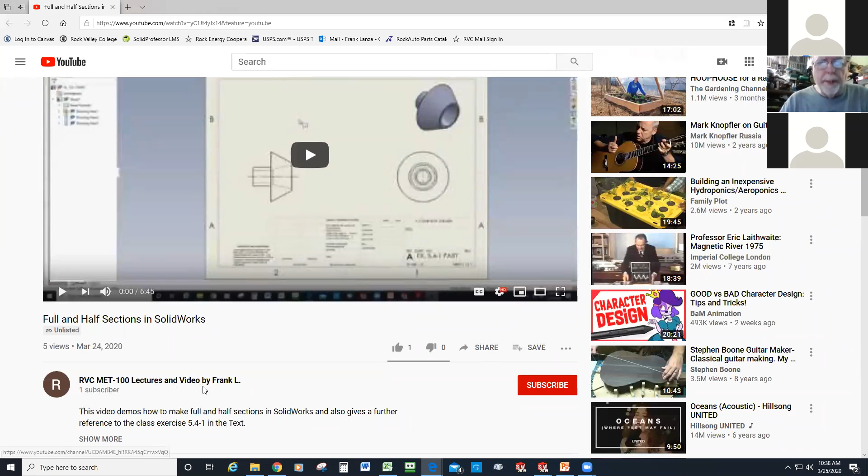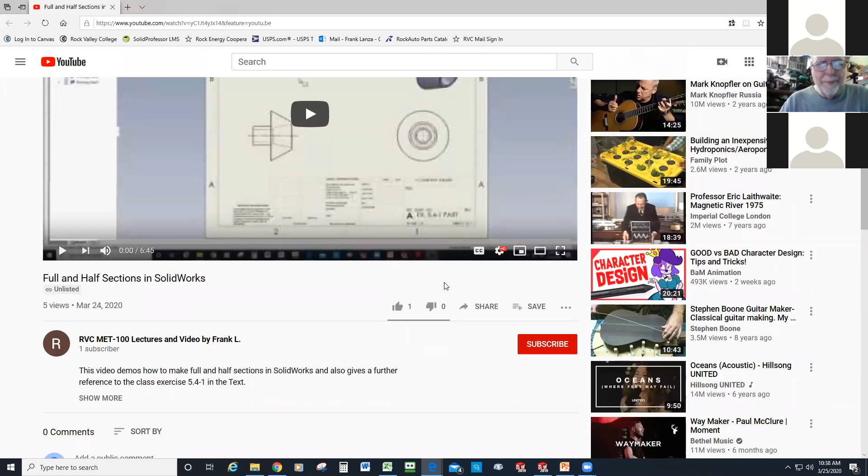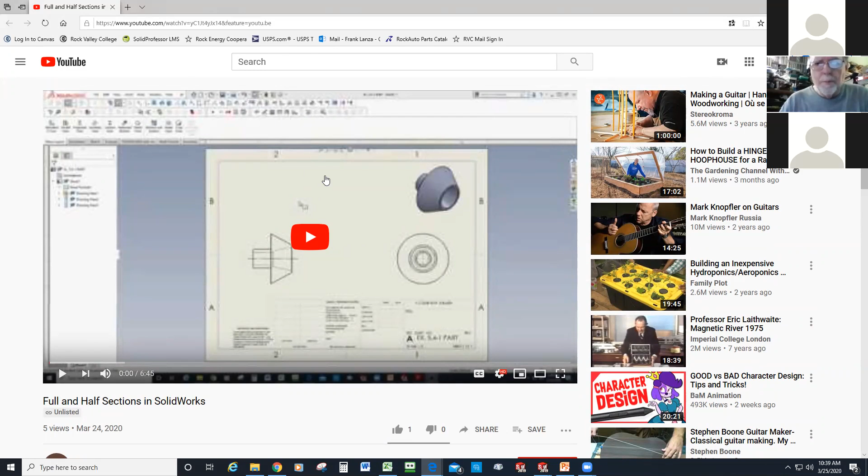So hopefully that'll get you in there, and I'll go back and look and see. Like I said, I might have, when I created it, said it was private, assuming I was going to send a link to everybody, and in my half-asleepness last night I never did in that email. But I may just go ahead and change it to public so that everybody can see it. I mean, there's no reason probably not to, unless I get some Yahoo that decides to start posting stupid stuff to it. Well, I think you can shut the comments off.

Can you? Yeah, I think. I guess I don't really want to. Oh no, yeah, you can shut off the comments before you upload the video. It'll have like a little box somewhere within the uploading portion where you can turn off the comments for that video. So Angel, I should have you come over and give me some instruction on how to do this stuff, you sound like you know what you're doing. I've uploaded maybe like 2 or 3 videos to YouTube before. That's probably 2 or 3 more than I have, because this is the only one I've done so far.

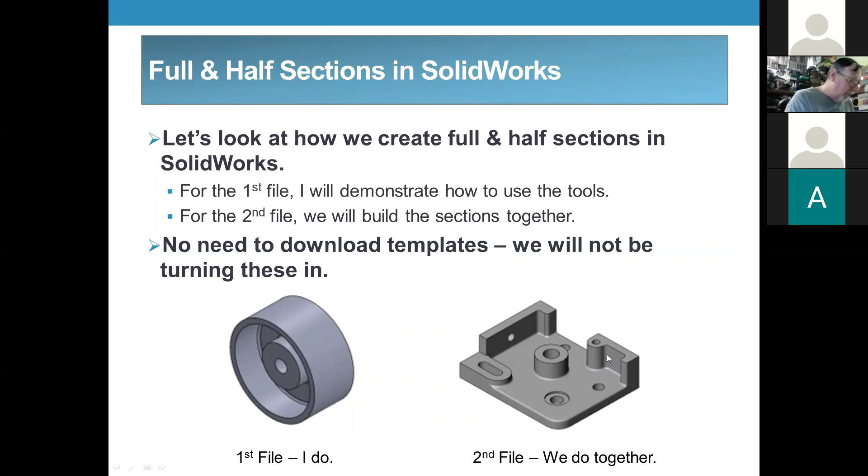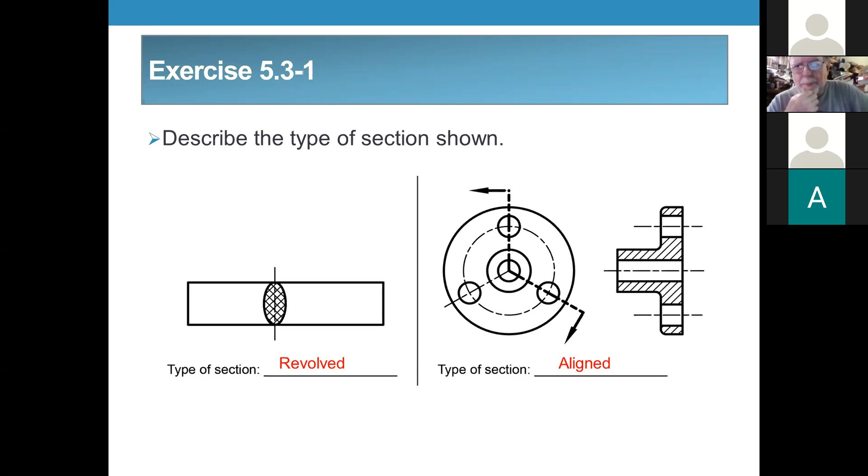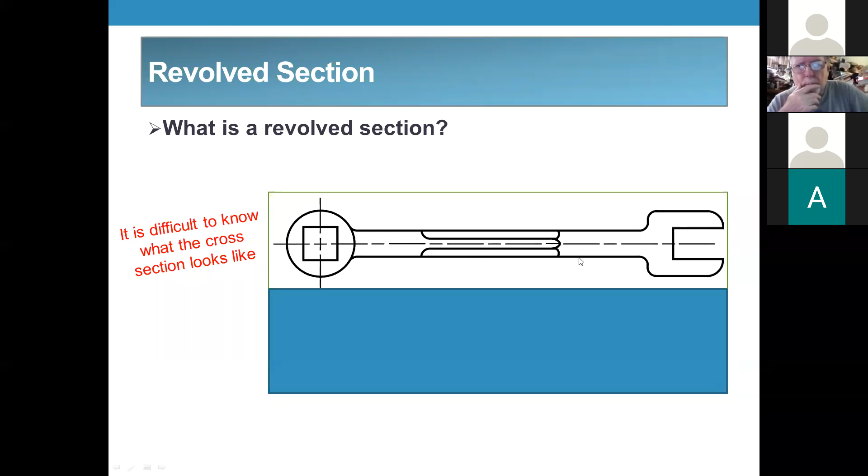So anyway, here is where a revolved section would come in handy, because when you look at the profile of this section of this wrench, it's actually 3 different profiles. It shows all 3 in this view. This portion of the handle is square, then it transitions to an octagon profile, and then from there it transitions to a circular profile.

So you'd have to cut 3 different sections if you didn't revolve them inside the part like this. You'd have to cut 3 different sections if you wanted to show them out, off to the side. With a revolved section, you can just basically show them inside the part itself.

Can you do that in SolidWorks? Yeah, because obviously you have control of where you place the section view. So if I were to cut a section here, say, cut an AA here, and pulled it out over here, it would show that square. I could drag that square back into the part and place it there, then do the rest of them that way too.

It's a case where, because you're not making a separate section, you can include the hidden lines in this view, because it's really just a view created off of this top view of the wrench. You created a front view off the top view, or vice versa. But you're just cutting the section view and placing it back into the front view, so whatever hidden lines are there can remain.

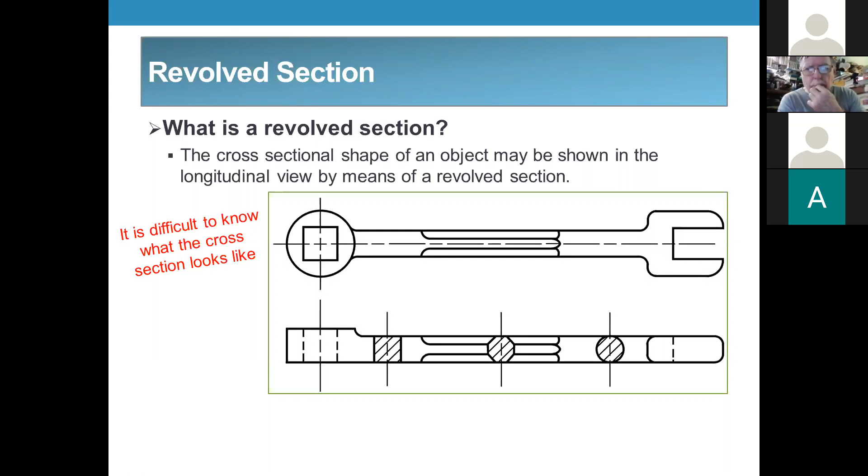So that's one kind of exception to the rule where, you know, the standard says you don't show hidden lines in section views. This isn't really a true section view, so they give it some leeway.

SolidWorks does it for you automatically. You may have, in the homework assignments, one problem where you might have to create an aligned section like this by hand. You just do your best. If you don't have a compass or a protractor, do your best to transfer the information.

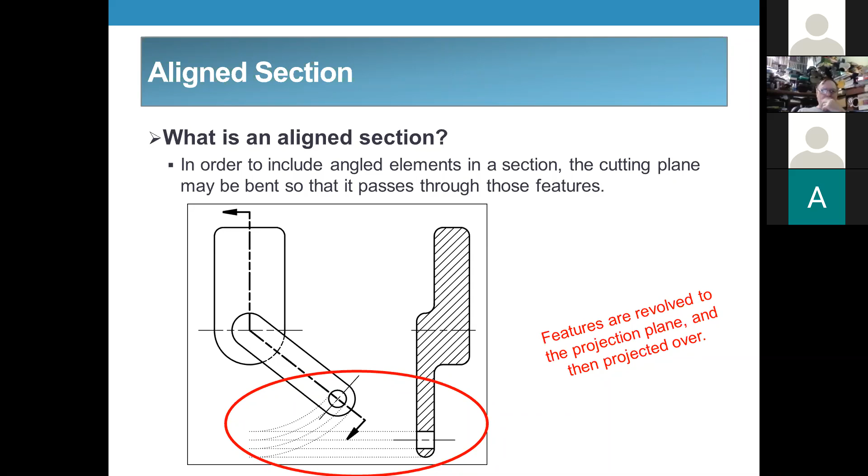Yeah, well, I have a feeling that when we get into, like I said, probably earlier, we get into GD&T and threads and limits and fits, all of a sudden there's going to be a whole lot of people asking a whole lot of questions. Because if you're not comfortable with it or familiar with it, they're going to need help.

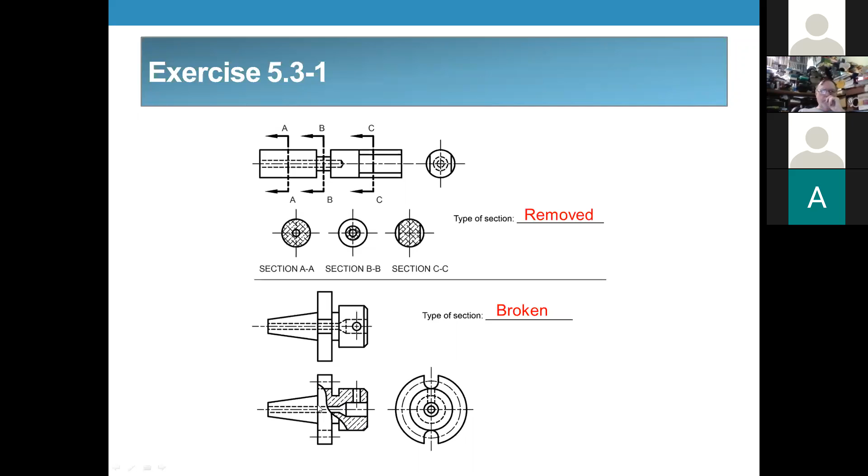And then if there's only a few features or one feature that you need to show or to dimension that's hidden, you don't need to do a whole section view. You can just do this broken out section so that you can dimension or call out the features that you need to call out without having to do a whole other section view. So this would be the front view with this portion of it broken out and cut away so that you can see the interior. And then you just go about your business, dimensioning it like you normally would.

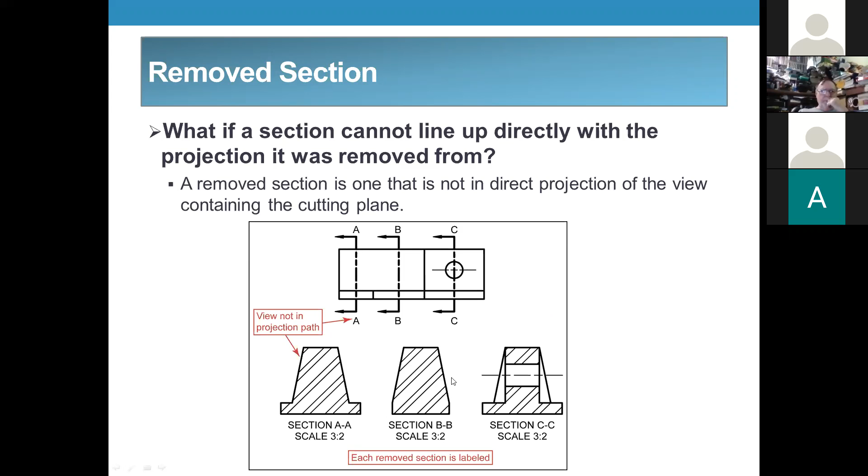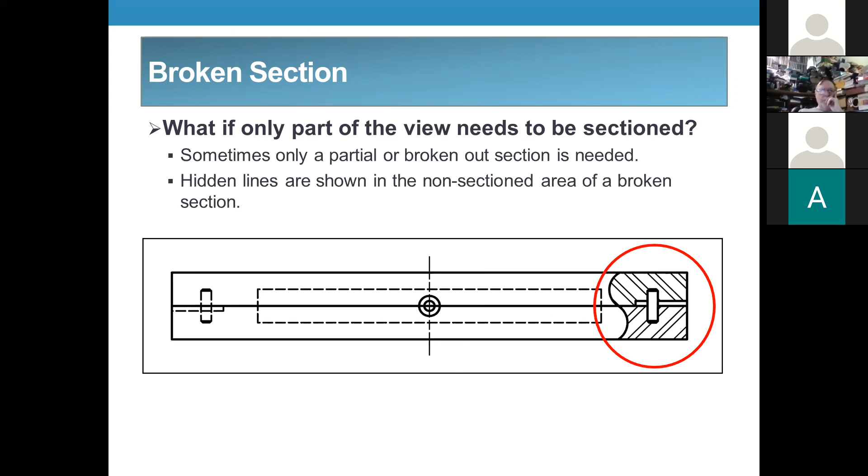So if a section view can't line up directly with the projection that it was removed from, then you remove it and place it in a different location, just like we just talked about. And if only part of the view needs to be sectioned out, then you do a broken out section, like I just talked about.

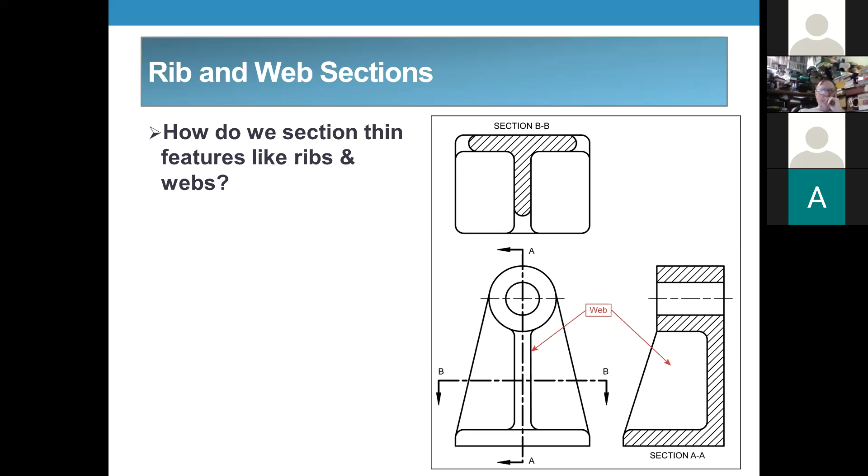Sectioning ribs and thin features like webs. There's the rule of thumb, the easiest way to say it. When a cutting plane goes lengthwise through a web, you don't show section lines. So even though we're cutting through this gusset or this web, whatever you want to call it, we don't show section lines in there because section lines are usually only shown in surfaces that the cutting plane line is perpendicular to, as it were.

So this base, we're perpendicular to that base. We're actually perpendicular to the back portion when we're perpendicular to this round portion here. So we show the section lines that represent this circular feature, and then also the base and the back of the part.

And then, along with that, when we look at section BB, now we're cutting perpendicular to both the back section and this web. So at the elevation that we're cutting at, we show the cut and we show the section lines. So everybody understand this cut and why it looks like it does?

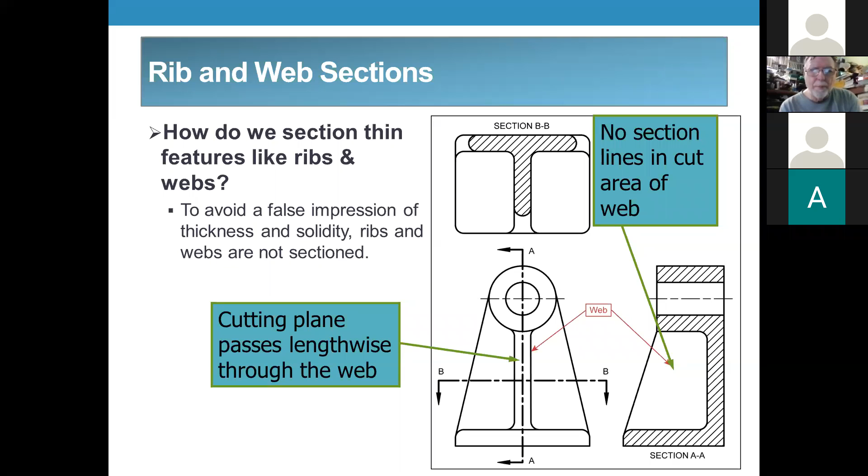Okay. At some point, somewhere I modeled this part. I was hoping to pull it up today, but I couldn't really find it because I've got stuff on Google Drive and I've got stuff on my hard drive, on my desktop. And the bad thing about Google Drive is it doesn't show you any previews or thumbnails for SolidWorks parts or drawings. So you don't have a clue what they are until you download them.

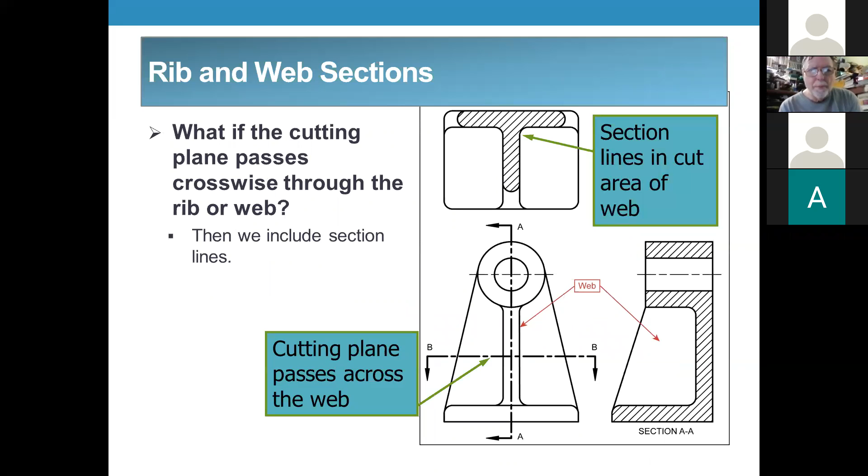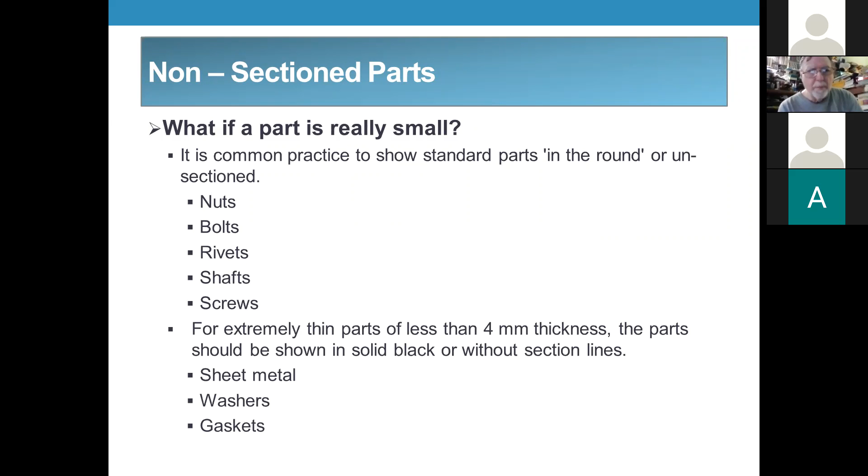So here we go. Again, that's kind of what I explained in the previous slide, so I'm not going to go back into much detail. You can take a look at it again if you want to. Parts that are small, like nuts and bolts, rivets, and washers, usually don't show the section lines. Usually just show either a solid black or as cutaway without any section lines in them. Back to the P39.

Basically, what I want you to do with this is... Yeah, see, I was supposed to get a full 40 minutes today. That makes me mad. It says we're gonna end in 10 minutes. As far as I understood, if I schedule this meeting right away on Monday, which I did, they were gonna bypass that 10 minutes. So we'll see what happens.

So the P39, I just want you guys to do the first part of it, and then I'll probably extend the due date, because if you look at today's assignments, we also have this Chapter 3 drawing project, which is an isometric and an oblique of a part that you need to draw. So I'm not foregoing this assignment. You'll have the whole rest of the semester to get it done. But the practice is good for visualization. The more you do by hand, the easier time you have visualizing parts and drawing views, even in SolidWorks. So that being said,

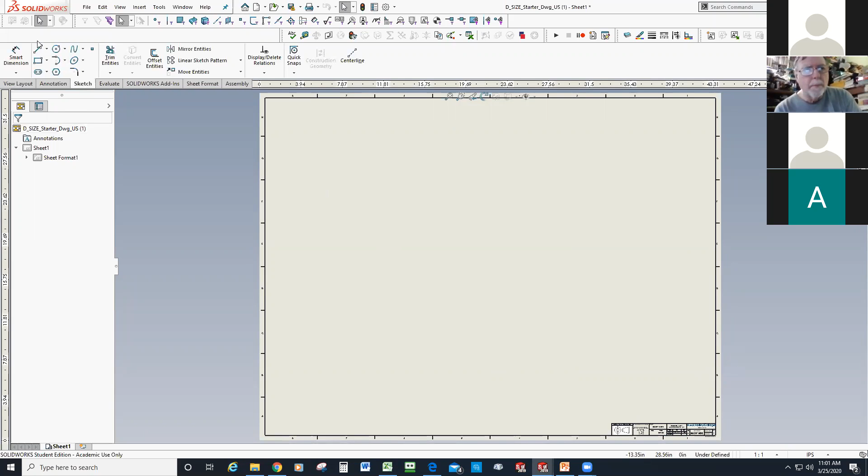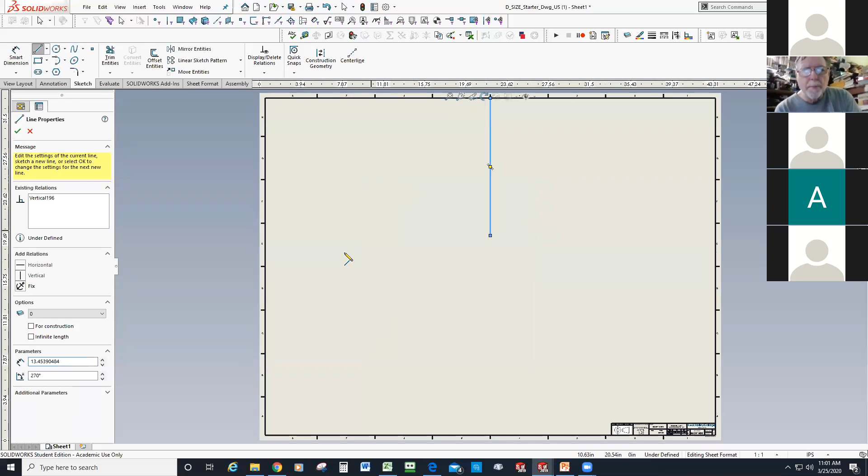let me go to SolidWorks and see what I can pull up here. This is a D-size drawing, and I've got some parts open already. Here's what I'm going to do. I'm going to go to Edit Sheet Format, which basically allows me to modify the title block and all this stuff. And I'm going to do a couple of line sketches about the middle of the... it wouldn't let me see the whole thing because this thing was in the way. I'm going to bring a line like that, and I'm going to take this guy and just drag him. See what's happening there? See, I can modify all that.

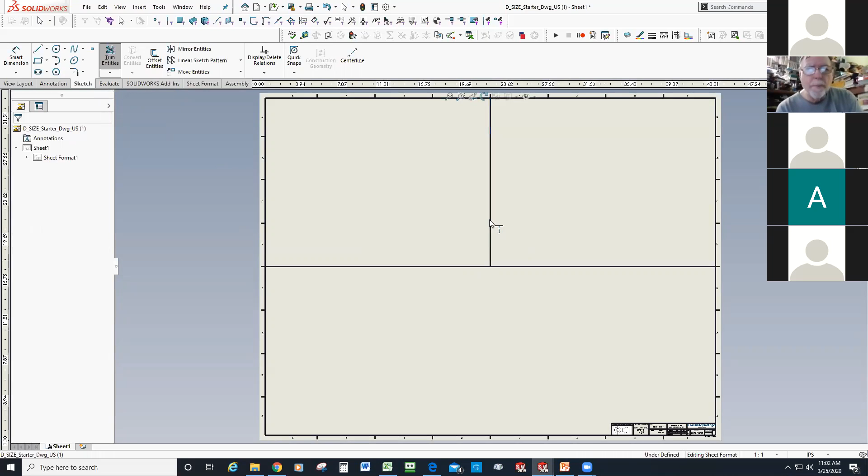So instead of dragging that, I'm going to use Extend Entities. I'm going to extend that to there, and then extend it down to the bottom. And that stops me from changing the border or any of that other stuff. So now that I sketched in Edit Sheet Format, when I go back to Edit Sheet, I can't do anything with these lines because they're now part of the border and the title block, but I've now divided this thing into basically four quadrants, and I can bring some parts in.

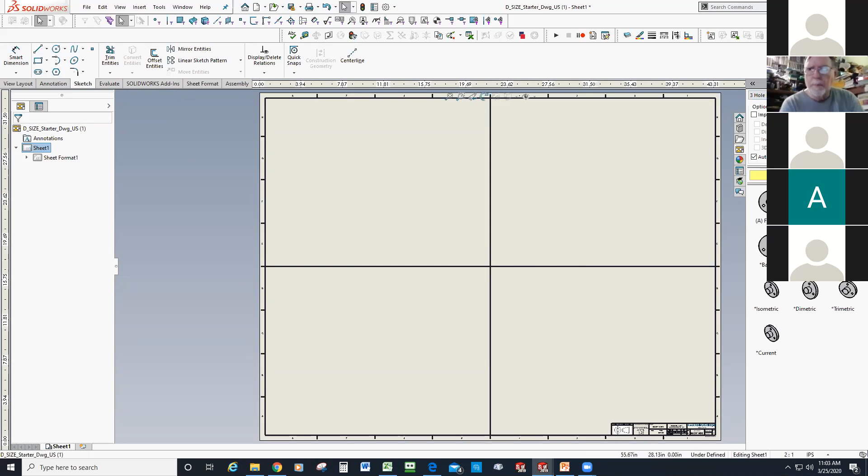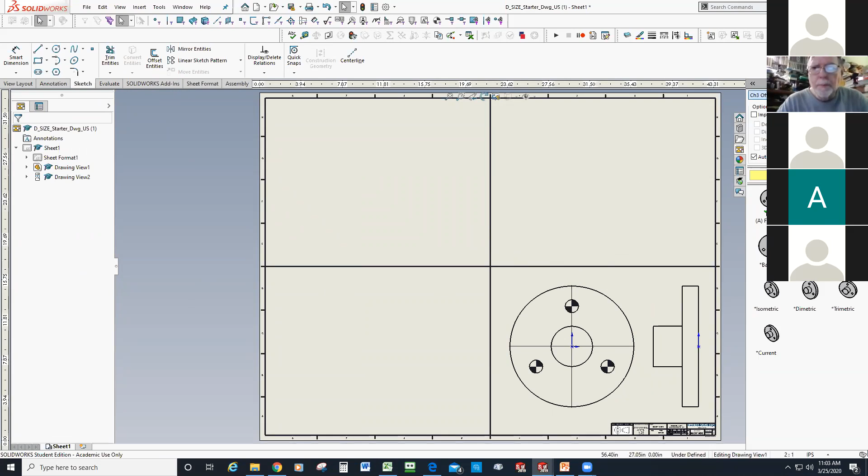They're coming in big. So that's all right, we'll change the sheet scale when we're done. So I can bring more than one part in if I want. This offset section, we're just going to bring this guy in. And then

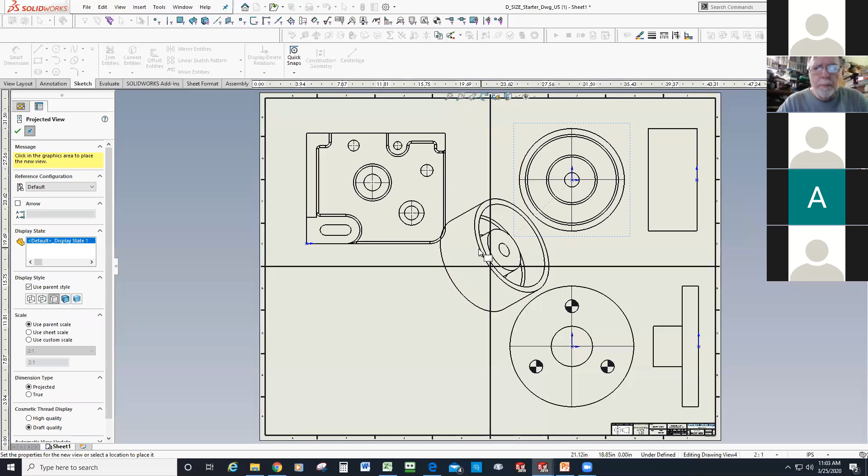This is the one that said I'm going to do it, and then you're going to do. But we've kind of already demonstrated how to do full and half sections, and that's what that video is all about. So I was hoping I'd have time to do the work on all three of these. But instead, what I'm going to do is concentrate on this guy and see if we can get an offset done on this part before time runs out.

So I'm going to go back to the View Layout tab and go to Section View. If I go to Aligned or Auxiliary, that doesn't really do anything for me. I want to cut my sections this way, so I'm going to go to a vertical cutting line. It looks like the very first place I want to start is right at this hole, so I'm going to place my line in the center of this hole and just select it right there.

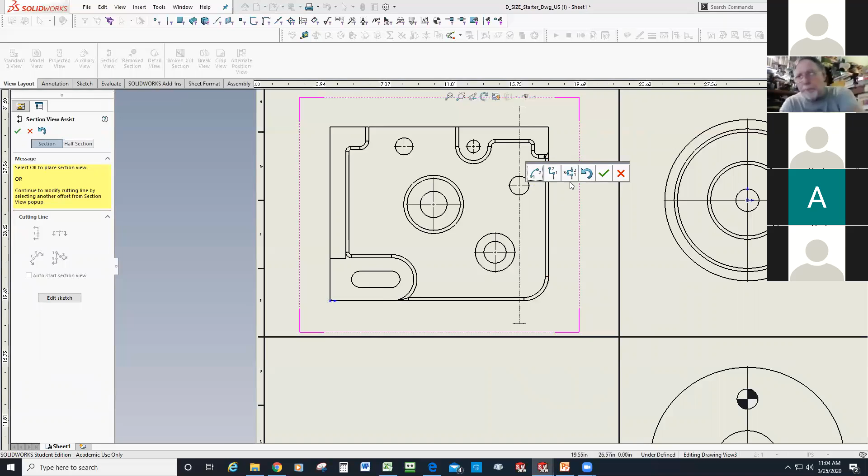And then I'm going to use one of these offsets, a single offset. Before, what I did was I just checked okay and cut my section, a full section. Well, now I want to do an offset. So this is a single offset option. I'm going to select that. And if you notice now, I've got a little dot that's showing up there.

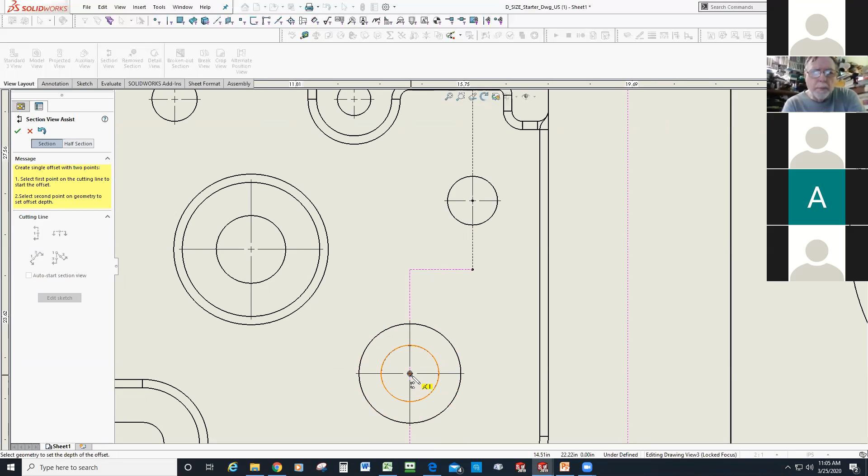Okay, I want to go to this hole. So I want to place that dot somewhere between these two holes. Now it allows me to offset the line. And then again, I'm going to select this edge or this edge to get the center. That's where I want to put my line; I want my line to go through this guy. And you see now I've got a cutting plane that's got that one offset in it.

So if I select OK now I get this section, and that's the section I want. And again, my arrows are facing to the left, so my section view has to go to the right.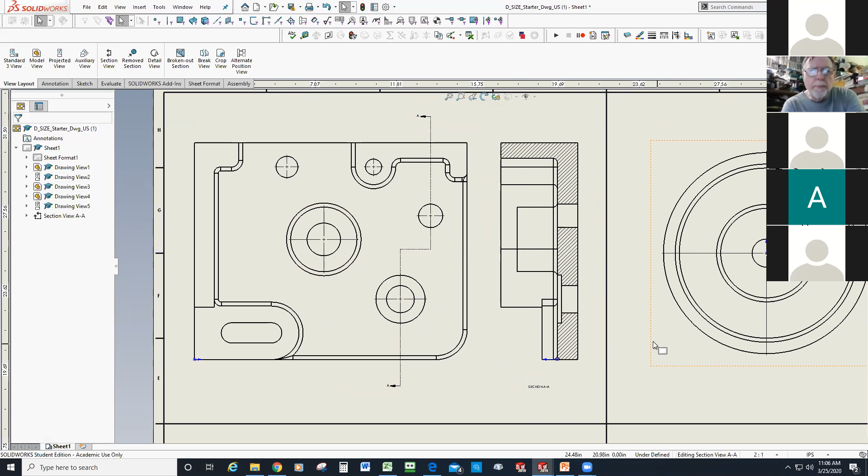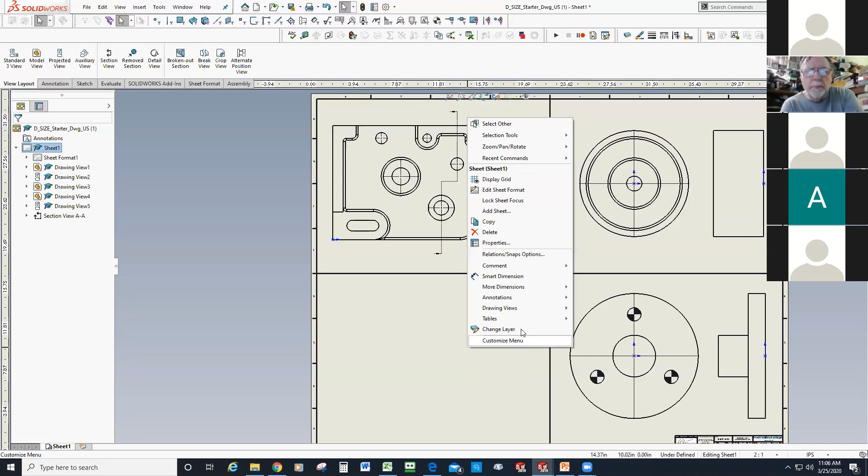Let me go to the sheet properties. Notice I had to actually use this double down arrow because I didn't see properties in here anywhere. I'm right clicking on the sheet and going to the double downs, and now this property shows up. You use it all the time; I don't know why it isn't default. But I can change my sheet scale right here, and that should globally change everything else because I think they all came in using the sheet scale. So if I make them 1-to-1 and apply the changes, all my parts now are 1-to-1.

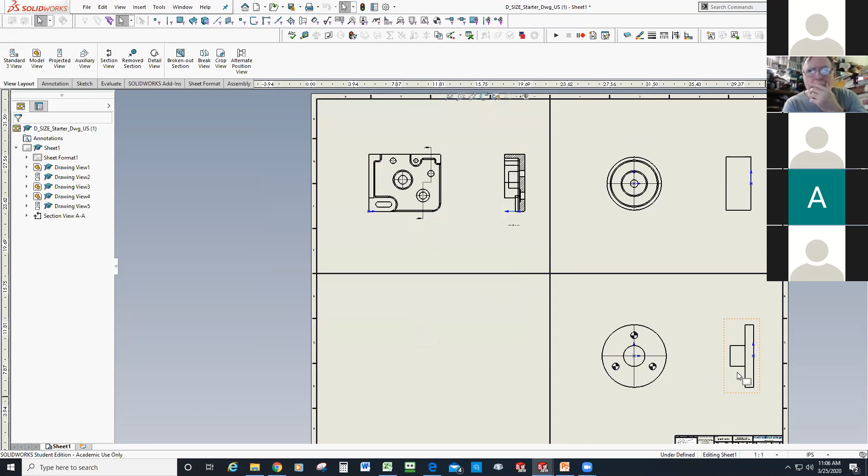If the scale were in here as a linked property, it would update and say 1-to-1. Before it would have said 2-to-1. So now I can put a couple extra section views in. The next one goes through this hole and then this hole.

So again, I'm going to do section view. I'm going to use the same vertical cut. I'm going to start here, go to a single offset, go down somewhere in between these two holes, go to the center of this guy, and then say okay. And now I've got section, hopefully BB. And then one more.

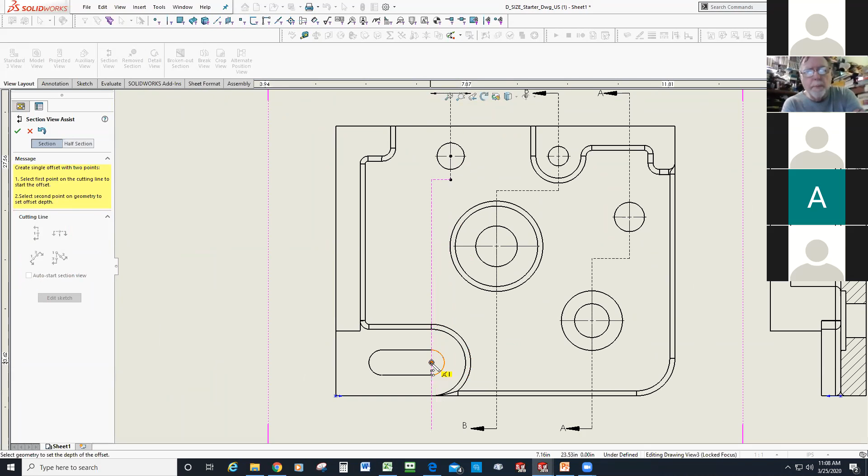I can't just keep going. I have to end the command and then restart the command to make the 3 that I want to make here. So this time I want to go down a ways, and then go to the center of this slot, and then say okay. Now I got section CC.

So now if I were to move this guy up, and let's say I didn't have room to fit these, or I only had room to fit 2 of them, let me get out of the command. If I highlight the view, right-click the border, go to alignment and say break alignment, now I can move that view wherever I want. And that's how you would create a removed section view. If I wanted to do the other 2, I could do them as well.

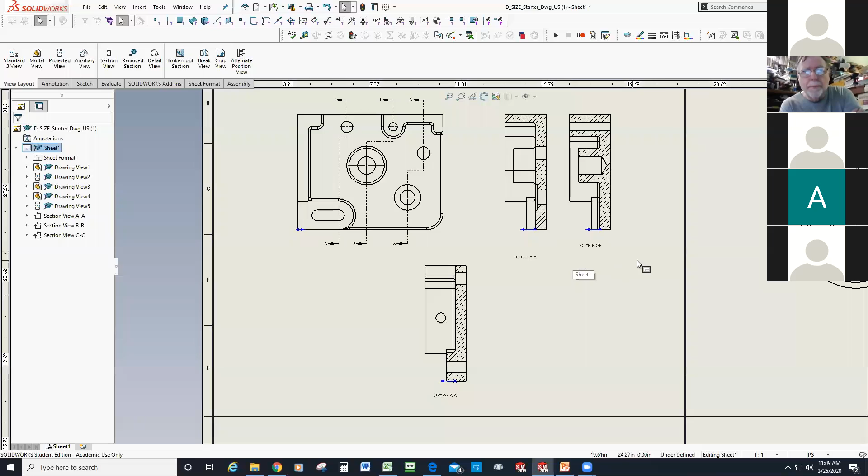Are we still on? Yes. Okay, only for a few more seconds. Is that right? Dang it. Yep, I see the timer right now. Well, this is what we're going to have to put up with until the end of next week, and then I'll start my